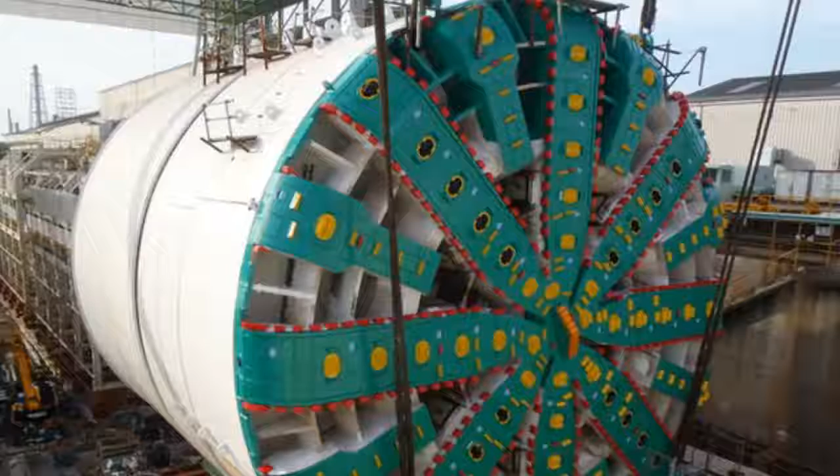Hard grind: the epic journey of the world's biggest tunnel boring machine.

On April 4, the world's largest tunnel boring machine broke through to the open air after almost 4 years underground. Called Bertha, the giant digger was tasked with building a tunnel large enough to carry 4 lanes of motor traffic under the heart of Seattle.

The story of how it made the 1.7 mile, 2.7 kilometer journey under the skyscrapers of the port city is not only a tale of a remarkable machine, but also of civil engineering, geology, politics, luck, and proving the old adage that anything that can go wrong, will.

Bertha's journey started not in Seattle, but in Nisqually, Washington, about 60 miles, 100 kilometers, south of Seattle. On February 28, 2001 at 10:54 a.m., the rural community was the epicenter of a magnitude 6.8 earthquake that rocked the region. Now known as the Nisqually or Ash Wednesday earthquake, the tremors wreaked havoc on the cities and suburbs to the north.

In Seattle, about 400 people were injured in the quake and 1 person died of a heart attack. Meanwhile, the brick facades of older buildings shattered and rained down on cars in the street, and many places of business were evacuated for fear of ruptured gas lines.

Though the traffic system was paralyzed by people trying to get home and the landlines and mobile networks were jammed, most places got off lucky with little more than knocked over furniture, and cans and boxes strewn on shop floors.

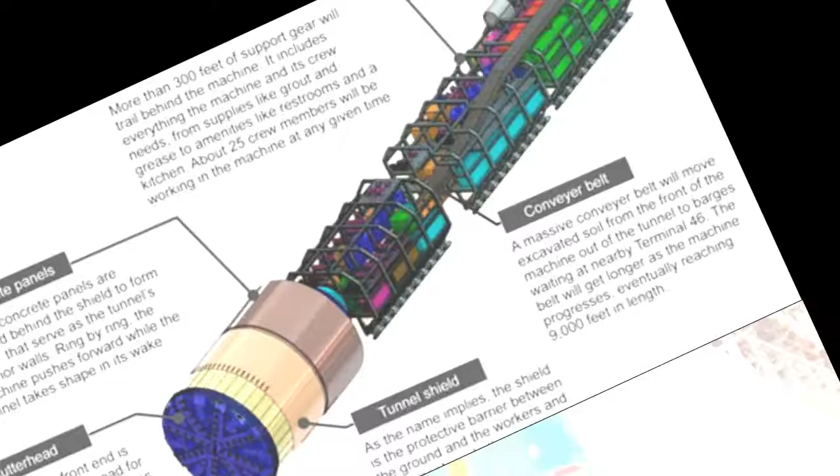But one thing that was hit hard by the quake was the area's infrastructure. Inspections showed that most of the bridges in the Seattle area were inadequate to withstand another such tremor, and a crash program was initiated to retrofit all the bridge piers with concrete sleeves as reinforcement. It was expensive, but it seems to have done the job, with one exception: the Alaskan Way Viaduct.

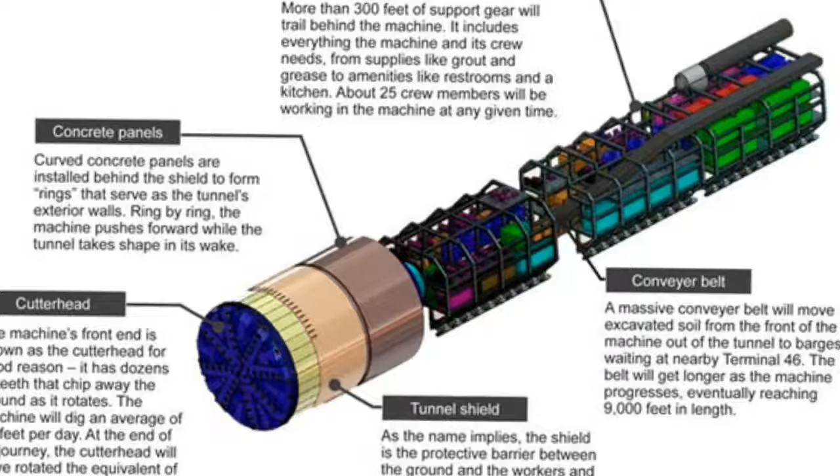A fixture of the Seattle waterfront since the 1950s, the viaduct was a 2-tier elevated roadway that is one of the major north-south arteries of the city, carrying tens of thousands of commuters and goods lorries each day on a scenic route along the waterfront.

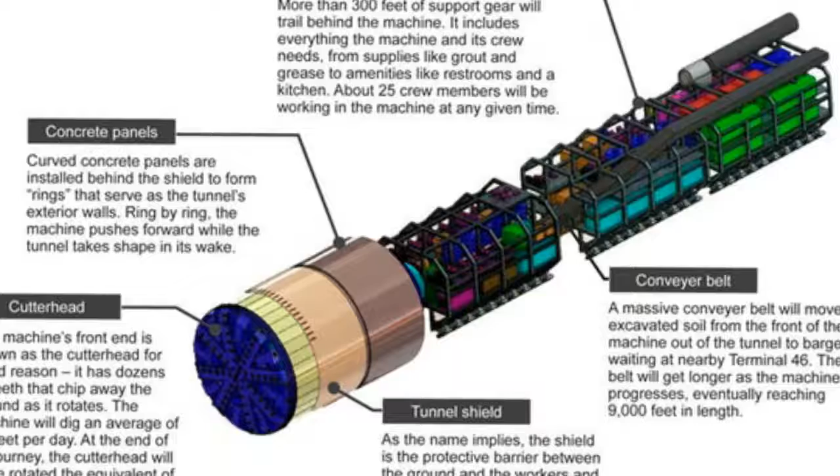It had suffered a moderate amount of damage in the quake, but engineers assessed that there was no point in making the extensive repairs needed because the structure was too dangerous. The basic design was too light and, instead of sitting on a solid foundation, the support pier sat in a bed of alluvial redeposit soil.

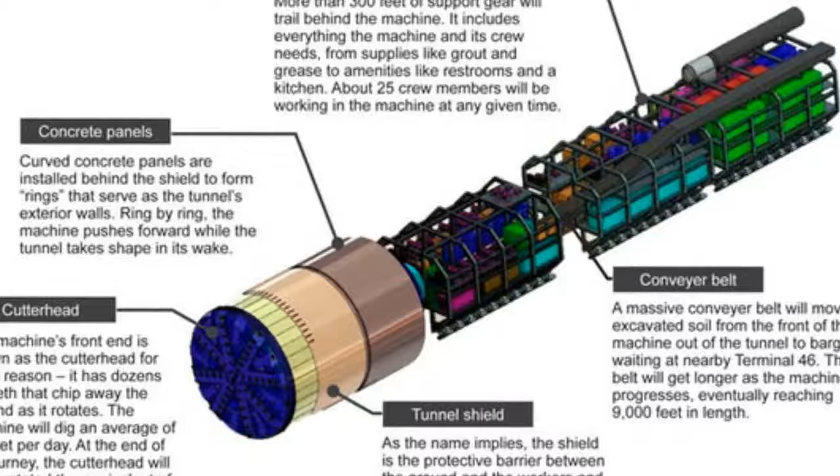Though the worst was repaired, the experts concluded that another earthquake could cause the viaduct to pancake, as happened in 1995's Great Hanshin earthquake in Japan. The question was not whether to tear it down, but when and what to replace it with.

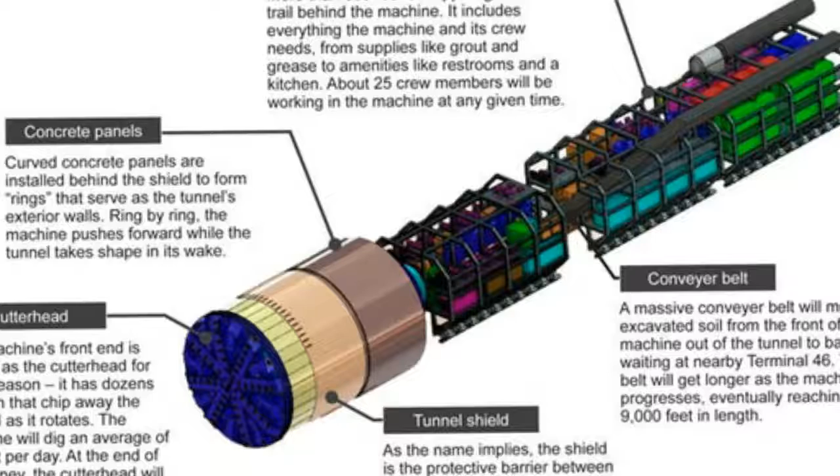What followed was almost 8 years of debate, deliberation, hearings, and flat-out arguments. Some people wanted to replace the old viaduct with a new one to keep things as they were. Others felt that the viaduct cut off the historic waterfront from the rest of the city and turned the area under it into a gloomy underworld.

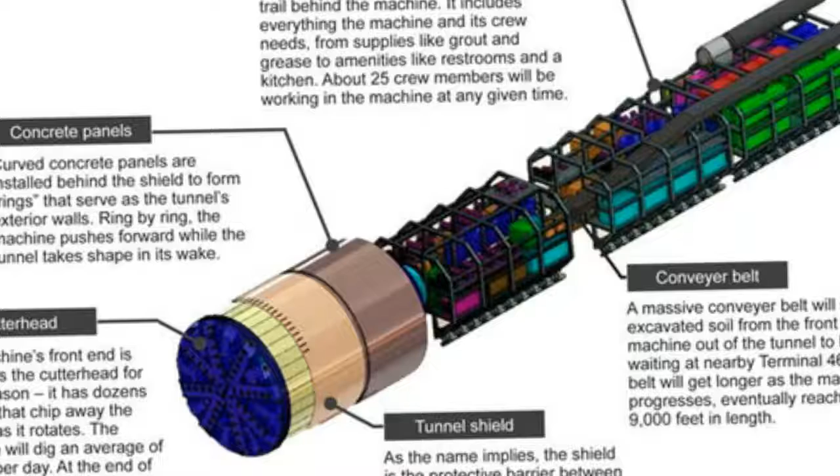Some advocated replacing it with a cut-and-cover tunnel. Others wanted a surface-level roadway. And the unabashedly anti-motor car types wanted the viaduct torn down and not replaced at all.

In all, over 90 proposals were looked at, but in January 2009 the state and city governments announced a new project by the Washington State Department of Transportation, WSDOT, and Seattle Tunnel Partners, a partnership of Spain's Dragados and Tutor Perini in the U.S. In this, the viaduct would be demolished and north and south stretches of State Route 99 would be reconnected by a $3.1 billion tunnel that would run away from the waterfront, the line of the viaduct.

and the Battery Street tunnel that linked the viaduct and the north end of the roadway. The tunnel would run under the city center at a depth of 200 feet, 61 meters, to avoid a forest of pilings, cables and pipes from some 160 buildings above. Meanwhile, the waterfront's sea-wall, which was also inadequate, would be rebuilt and strengthened.

This latter project was a tricky job in itself because the area is made up largely of redeposited soil from harbor dredging and is the home of several historic warehouse piers that are now major tourist attractions: the Seattle Aquarium, an active ferry port, a hotel, and a cruise ship terminal. It was thought that the tunnel would be least disruptive.

All this may sound straightforward enough, but to replace a roadway with as much traffic as SR 99 carried on a daily basis with a deep tunnel was unprecedented.

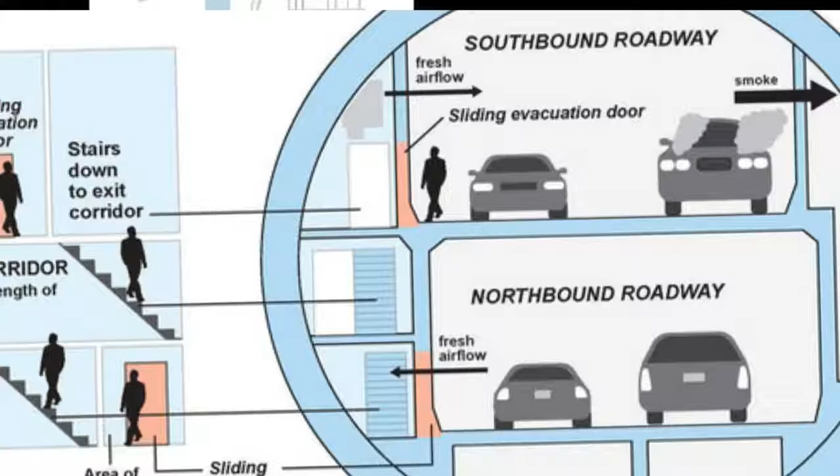It was not only deep, but the plan was for it to be 1.7 miles, 2.7 kilometers, long, and wide enough to hold a 2-lane double-decker road, ventilation and firefighting equipment, and an emergency pedestrian walkway concealed in one wall. Put all that together and the engineers soon realized they would need a tunnel boring machine, TBM, and not just any tunnel boring machine.

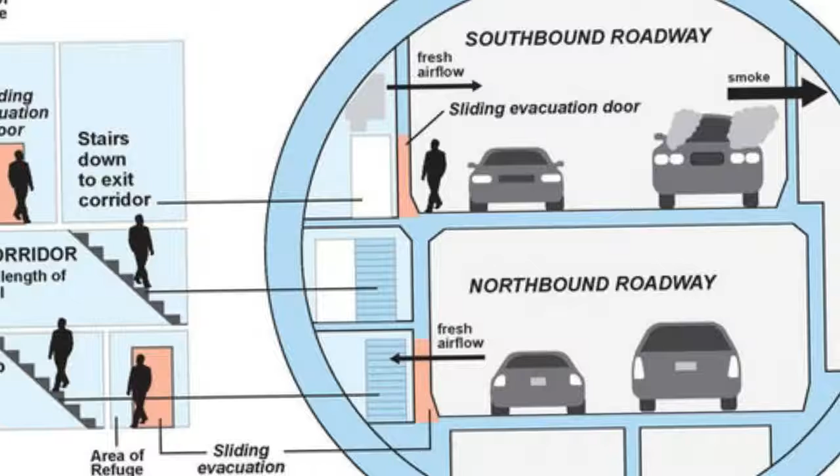TBMs are actually not that new. The first one was built by the famous engineer Sir Marc Isambard Brunel in 1825 to dig the Thames Tunnel at Wapping in London. Along with Thomas Cochrane, Brunel invented a machine that was basically a giant iron can, called a shield, turned on its side with one end open.

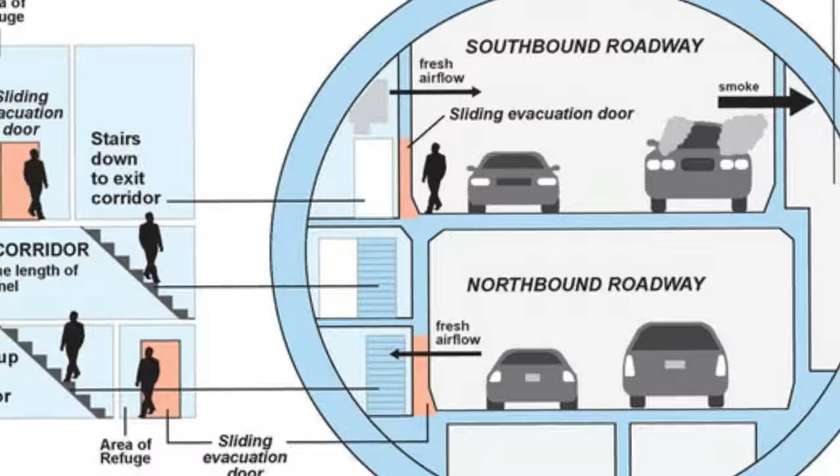The closed end is pressed into the digging end of the tunnel and consists of rows of small doors where workmen remove the soil using picks and shovels. Meanwhile, the shield held up the tunnel walls. When enough was dug out, the doors were closed and jacks were used to push the shield forward, and the walls were sealed with brickwork.

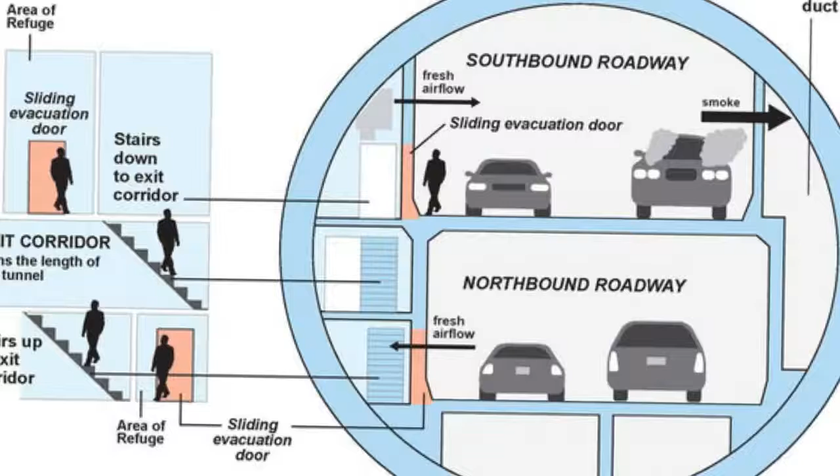Over the next century, these machines became more sophisticated as power was added alongside drills and rotating digging heads. They eventually became common tunnel excavators and were used on projects like the Channel Tunnel across the English Channel, Japan's Seikan Tunnel from Honshu to Hokkaido, Switzerland's Gotthard Base Tunnel, and the Crossrail Tunnel under London.

Bertha, named after Seattle's first woman mayor, is what is known as a soft rock TBM, as opposed to a hard rock TBM. The latter, as the name suggests, is essentially a big rock drill designed to bore through solid granite or something equally nasty.

That's not to say that Bertha had an easy time of things. Far from it. Soft rock TBMs have to contend with sand, which can be as damaging to machinery as rock, as well as gravel, clay, loam, and the odd boulder or other surprises.

Bertha had a particularly hard time because the Seattle area was formed hundreds of thousands of years ago by a series of glaciers pushing to and fro during the Great Ice Ages. This pushed up massive hills of debris made of 8 different kinds of soil under the city center.

In fact, the soils are so varied that across the face of the digging machine the soil types could vary radically. Worse, the line of the new tunnel runs from the waterfront, where Bertha was below the waterline, up under the city through 10 distinct geological zones to come out of a hillside, where the soil is bone dry.

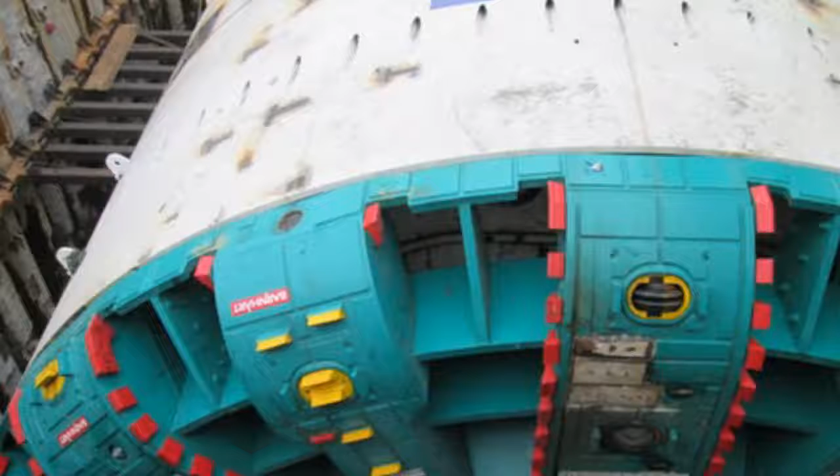It also didn't help that after a century and a half of building, Seattle is a warren of foundations, pilings, cellars, sewage lines, railway tunnels, road tunnels, and pedestrian tunnels. And then there's the famous underground city that was buried and built upon after a fire devastated the city in the 19th century. Even before tunneling began, old deposits of fill soils had to be removed and areas strengthened to withstand the passage of the TBM.

To create a machine that was large enough for the job, Hitachi Zosen Sakai Works in Osaka, Japan was selected from a list of 5 candidate firms to design and build the 57-foot diameter, 17.4 meter, mechanical behemoth. It weighs in at 6,559 tons.

It wasn't possible to ship Bertha across the Pacific in one piece, so after testing it was disassembled and shipped to Seattle, where it arrived in April 2013 and was put back together again at the bottom of an 80-foot, 24.3 meter, deep, concrete-lined pit on the waterfront in the shadow of the viaduct. Here's how it works once put back together.

New Atlas and other members of the media were invited to tour inside Bertha, and that in itself is an indication of just how large it is. Most digging machines are things you look at from the outside, but the Seattle TBM is so large that it's like a cross between a gigantic locomotive and a cylindrical factory, 322 feet, 98.2 meters, long.

Instead of a solid piece of machinery, it's filled with catwalks, ladders, and stairs. It even has a control room inside, as well as a pair of break rooms. Remarkably, despite its size, Bertha is largely automated and only needed about 25 people to operate it at any one time.

One key factor when digging is the presence or absence of water. Depending on how you look at it, they can both be a blessing or a curse. On the one hand, having water in the soil ahead makes it easier to cut through and move, so if there isn't enough, Bertha is able to inject water and a soapy conditioner into the soil to break it up into a soft paste. But if there's too much, the cutter head ends up ineffectual, churning a load of liquid mud without going anywhere.

In addition, that excavated soil slurry must be made to go only where it's wanted. To do this, the cutter head is pressurized to up to 5.6 atmospheres. This helps to force the slurry to stay in the cutter head until it's removed, but it's a fine balancing act. The machine maintains a constant pressure on the trapped soil. If there's too little, the slurry just churns inside the cutter head and the front face of the tunnel could fall in. Too much, and the machine is pushing a wave of slurry ahead of itself.

One unpleasant aspect of the pressure system is when the cutter head needs servicing. Pressure must be maintained at all times, so when a tooth is worn out or a boulder needs shifting, the workers have to take on the role of deep-sea divers and pass through an airlock to work inside a pressurized bubble of air inside the cutter head.

Directly behind the cutter head inside the machine is the slurry pipe. This is a steel tube about 3 feet, 1 meter, in diameter that has a very important function. Without it, the slurry coming from the cutter head would blast into the digging machine with 5 atmospheres of pressure behind it. Instead, the pressure is reduced until the slurry can pass safely through it, impelled by an Archimedean screw onto a conveyor belt, which sends the soil back to the end of the tunnel and out to a waiting barge on a nearby pier.

As with Brunel's original machine, this is a cylindrical hull that holds up the sides of the tunnel wall and protects the machinery and workers from muck and water. It also allows the TBM to move forward.

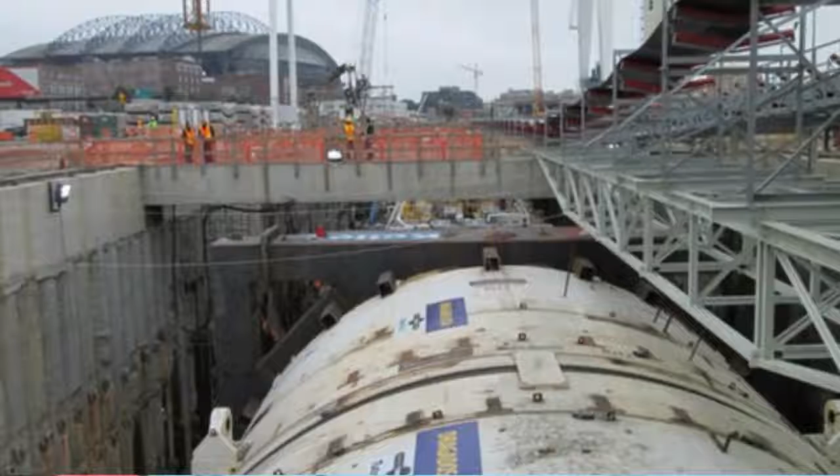In addition, there are other jacks used to align and steer the shield. The lining rings are made of 10 concrete panels, with each ring weighing 360,000 pounds, 163,000 kilograms, lined with rubber gaskets to keep water out. Some panels are shorter than the standard size to allow the tunnel to curve in certain sections, to allow it to go left, right, up, or down. Behind each panel is forced grouting to stabilize the tunnel.

One interesting thing about the lining panels is that they are not laid by hand, but by a pair of robotic erector arms that collect the panels from an electric tram and place them precisely against the inner wall of the steel shield in a staggered pattern. Having 2 arms allows Bertha to lay down panels twice as fast as other machines.

As the shield moves forward, the grouting is injected into the exposed gap where the steel once was, and the process continues. Based on previous motorway tunnel borings in Spain, this gap is designed to be as small as possible to improve stability.

Also inside the shield is the control room, where the workers monitor Bertha's systems by computer, guide it, look out for signs of earth shifting unexpectedly, or if too large a boulder is encountered that might have to be broken up by hand.

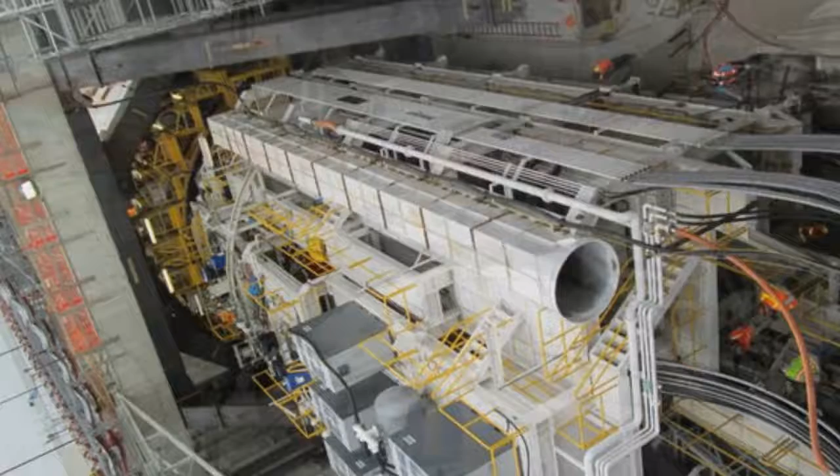Behind this is the break room, which might seem like a luxury unless you remember that by the time the digging was completed, the walk back for lunch would have been almost 2 miles.

Trailing gear: if the shield is Bertha's head, then the trailing gear is the digestive system, articulated and resting on massive rollers. The 300 feet (91.4 meters) of girders and gear contain the machinery to supply the TBM with grout and grease. Inside are the pumps, ventilation equipment, restrooms, a kitchen for the crew, and a rear control room to handle the section's operations. It's also where the liner sections are collected from a small electric railway car called a segment transport truck and moved forward for placement.

Bertha's tale: Bertha digs in on July 30, 2013, under the eyes and cameras of the international media. Bertha powered up, the cutter head started rotating, and the TBM started its career in a cloud of white dust as it cut into the cement plug on the north end of its containment pit. It was expected to emerge on the other side of the city center in 14 months, and by 2015 the project was due to be completed.

It seemed as if the actual tunnel digging was nothing but a formality leading up to the cliched and anticlimactic ribbon cutting, but it turned out that Bertha had more than rock and clay to dig through. It also had to go through a lot of unknowns to get to its goal, and some of those bit back hard.

One of the big unknowns for the project was the geology. Though the entire route had been studied and core samples drilled, the soils ahead of Bertha were remarkably complex, and this was especially true at the start, where large areas are made up of redeposited soils from dredging and construction.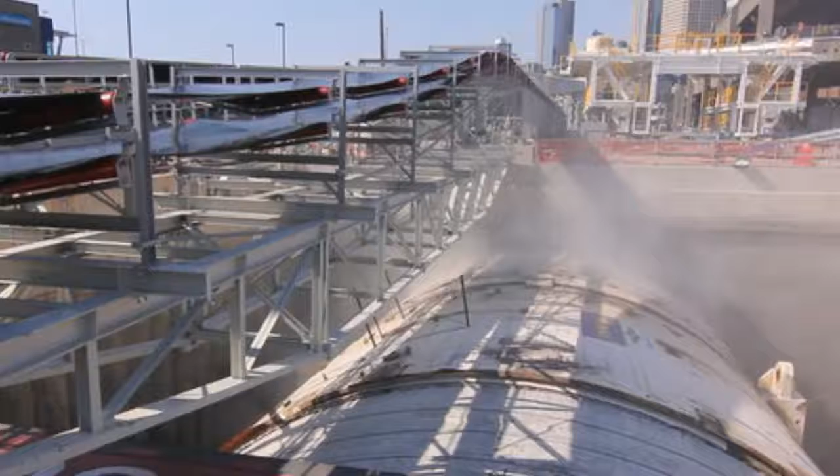However, another big unknown was Bertha itself. It was a one-of-a-kind machine, which means its one and only field test was the job itself. Even WSDOT admitted there was a bit of a learning curve as the machine dug into the earth. Exactly how it would perform and how to handle it couldn't be sorted out beforehand.

Bertha shuts down. Then in December 2013, the unknowns came together in a cocktail of failures that almost doomed the whole project. On December 3, the TBM shut itself down after traveling 1,083 feet (330 meters), having struck a steel pipe that the Seattle Times newspaper said was used by WSDOT engineers to measure groundwater and had been left behind by mistake. Then on December 6, things really got bad.

The rubber seals around the main bearing failed and grit got into the workings, resulting in broken parts and damaged gears as the TBM overheated alarmingly. Whether this was due to hitting the pipe or due to design flaws is still part of a legal dispute between WSDOT and the contractors, but the upshot was that after several attempts to move, by February, Bertha was trapped 120 feet (37 meters) underground with no way to back out.

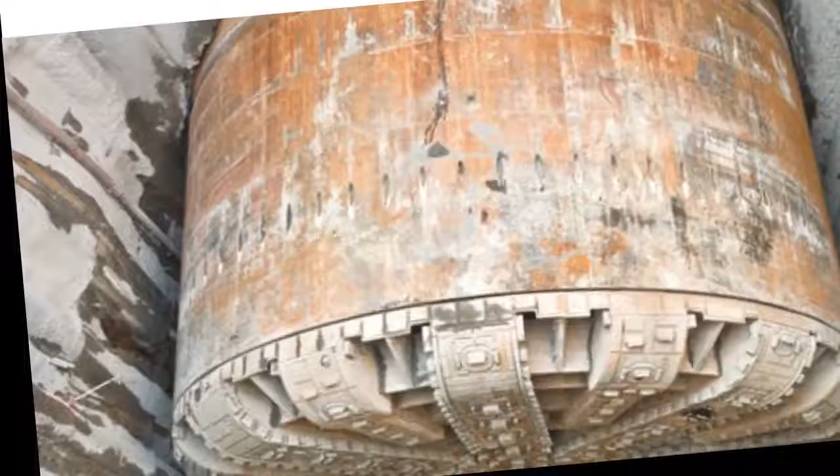Repairing Bertha, a month later, Hitachi concluded that the only way to repair Bertha was to dig it out and partly dismantle it. In other words, saving a major engineering project would mean starting another major engineering project. To repair the TBM would mean sinking a 120-foot deep, concrete-lined shaft ahead of Bertha in an area of unstable, waterlogged soils, coaxing the boring machine forward into the pit, lifting out the 2,000-ton cutterhead, partly dismantling the machinery, replacing a large percentage with redesigned parts, putting it all back together, testing it, reburying the whole thing, and then resuming digging. All this while dealing with mounting costs, union problems, political battles, lawsuits, and demands to shut down the project completely and leave Bertha where it was forever.

It was simple, like the Normandy invasion. Bertha in the repair pit.

One advantage of tunneling under a city is that it avoids the contractor's bane: archaeology. Many places have strict environmental regulations to protect archaeological sites, requiring proper surveys before disturbance. That was fine until it became necessary to dig the rescue pit, an area that included historical pits previously excavated and refilled. Now more geological survey holes had to be drilled for a detailed soil picture, and 60 test holes had to be dug to look for artifacts. Fortunately, nothing significant was found.

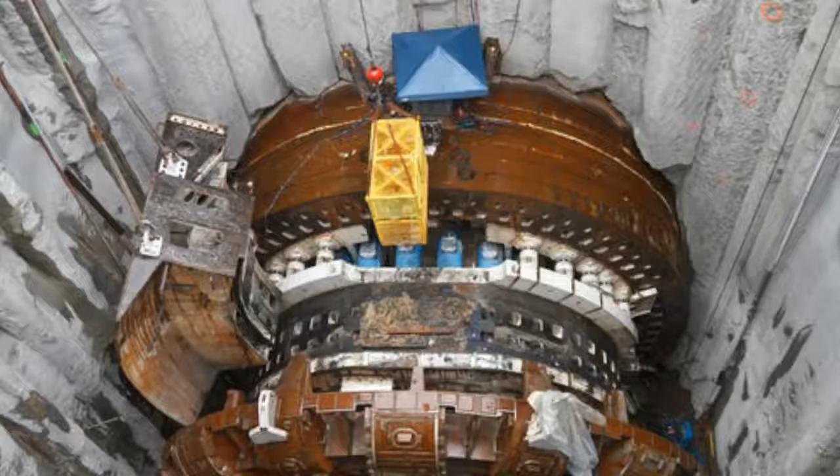More significant were the long delays caused by the breakdown. The damage to Bertha turned out to be much more extensive than originally thought, leading to lawsuits between the contractors over who should pay for repairs and delays—lawsuits that are still ongoing.

Equally significant were the delays caused by digging the rescue pit. Because the area was so waterlogged, engineers had to drill holes and pump water out of the ground, otherwise the earth would have collapsed in on itself like a soggy cake. It's a standard procedure, but not in such a built-up area, and in December 2014 a large crack appeared in a road in the historic Pioneer Square district. Fearing the pumping operations were causing a sinkhole, work was again delayed as new surveys were conducted and countermeasures implemented.

It took two days to cut through the plug itself, without overheating or stalling. It took a few more days to clear the pit of debris and move the front of the machine onto a pair of giant skids. Meanwhile, at the top of the pit, a giant traveling crane capable of lifting 4 million pounds, 1,800 tons, waited to lift the cutter head and other components out for repairs and replacement.

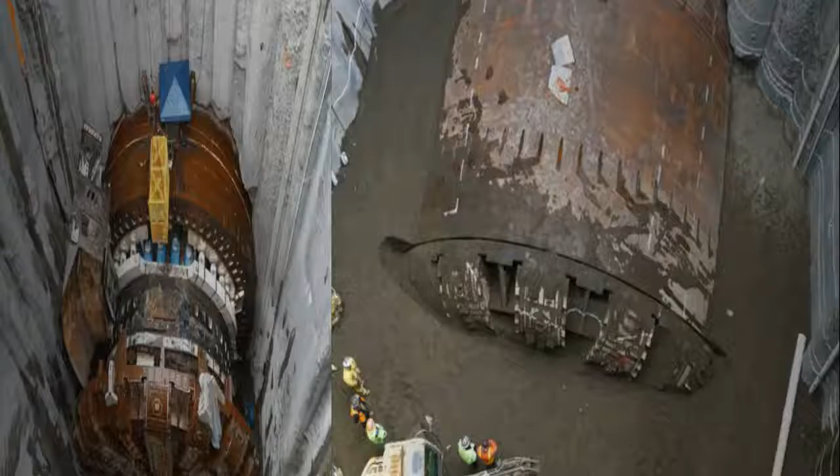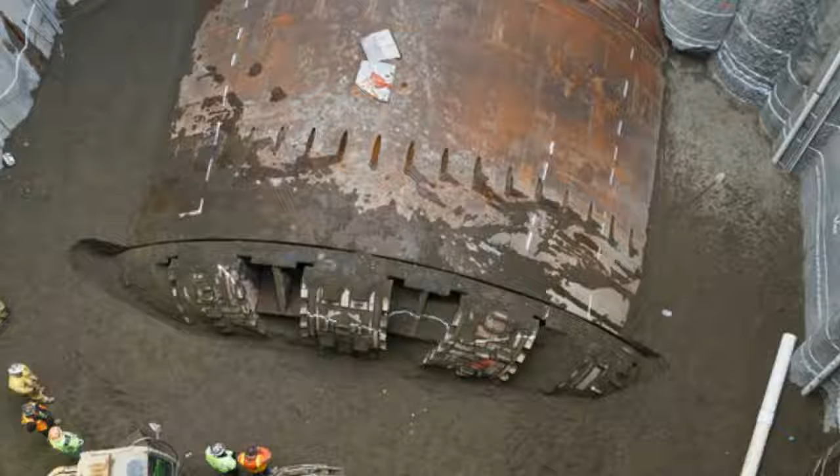Since Bertha was considerably larger than, for example, an MG Midget, and much of the shield had to be cut away with torches, the repairs took until December 2015. This involved hauling out the cutter head in one piece to refurbish it and replace many of the cutters, putting in new gears, installing a redesigned main bearing as well as new seals, electric cables, hydraulic lines, pumps, and control systems—not to mention putting back all the bits taken out to get at the damaged parts and re-welding the shield back into place.

Once all of this was done and running tests were completed, the repair pit was filled in with sand, capped, and the water pumps were turned off to allow the water table to reassert itself. Shortly before Christmas that year, Bertha started to move forward.

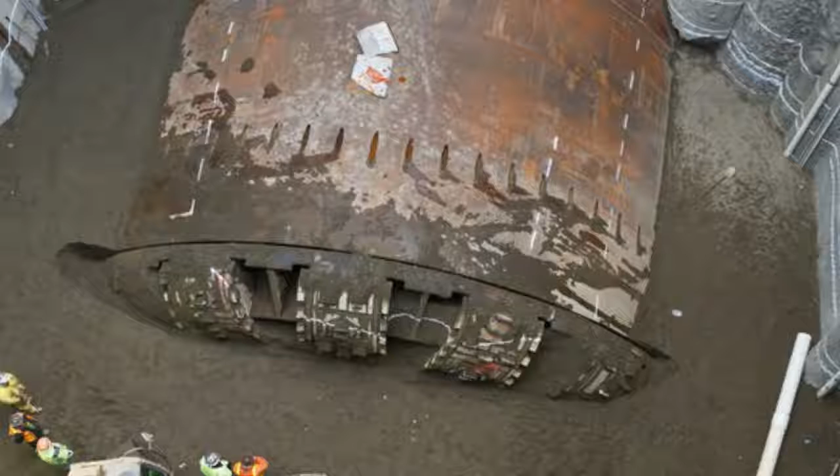With Bertha undergoing post-repair tests, it seemed the worst was behind. But in January 2016, as Bertha tunneled through a layer of stiff clay mixed with sand and gravel at a depth of about 120 to 150 feet (37 to 46 meters) under the fragile viaduct, another sinkhole opened up 100 feet (30 meters) behind the TBM, causing another shutdown for six weeks as 250 yards of concrete and soil were injected into the hole to stabilize it.

More serious was the political fallout, as recriminations flew regarding over-excavation of soil, demands for more aggressive procedures to stabilize the earth around the tunnel, and renewed calls to abandon the project altogether. There were more arguments over who should compensate whom for the delays. At this point, one almost expected someone to sue himself.

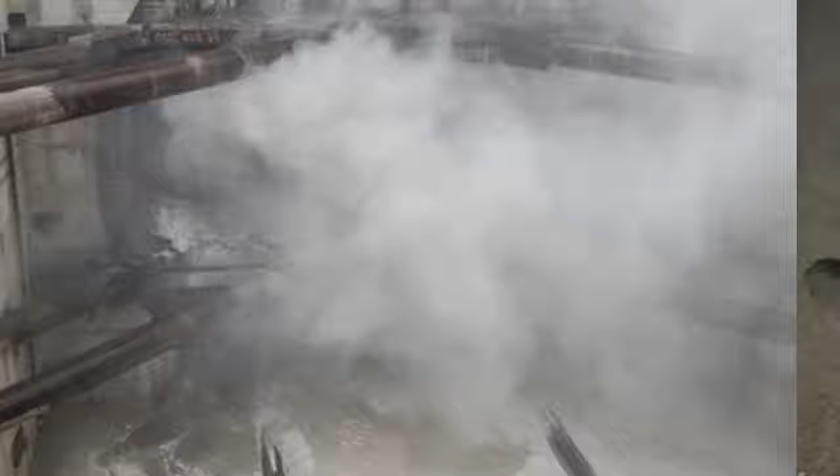Bertha digs again despite all of this bickering. Digging resumed on April 29, 2016 in a very public fashion. Despite being almost 200 feet (61 meters) underground, the residents of Seattle were well aware of what was going on, because the viaduct, still in use, was shut down for a fortnight as a safety precaution. When you tell 100,000 commuters they have to find another way to get to work, it gets noticed. Fortunately, no damage was caused by Bertha's passing, and the route reopened in May.

After that, Bertha dug deep under the city center, and the chances of affecting anything on the surface grew more and more remote. For the next 11 months, the TBM tunneled away without incident, with occasional stops for inspections and maintenance.

As it dug, the machine passed through many different layers of soil and the water table was eventually left behind. To compensate, Bertha started squirting water jets in front of the cutter, as well as foams and conditioners to break up the soil. Meanwhile, the usual arguments about money, schedules, insurance, and who was at fault over the initial breakdown continued between the state and the contractors.

Breakthrough then, after a final 6-inch course correction in March 2017, Bertha was at the end of its long and controversial journey. On April 4, after over 2 years of delays, the giant drill cut through the concrete plug at the reception pit built for it at 6th Avenue North and Thomas Street near the present SR 99 route. With suitable drama, the great machine ground its way through the plug, sending up clouds of dust as water jetted out and huge chunks of cement and rebar crashed into the pit as the press looked on. Dust erupts as Bertha breaks free.

It was an historic event, but history is not very kind to the likes of Bertha. It's a one-of-a-kind machine built to carry out only one specific job. Perhaps it would have been nice to put it in some extremely large museum, but it's also a very valuable piece of equipment, too valuable to let sit idle.

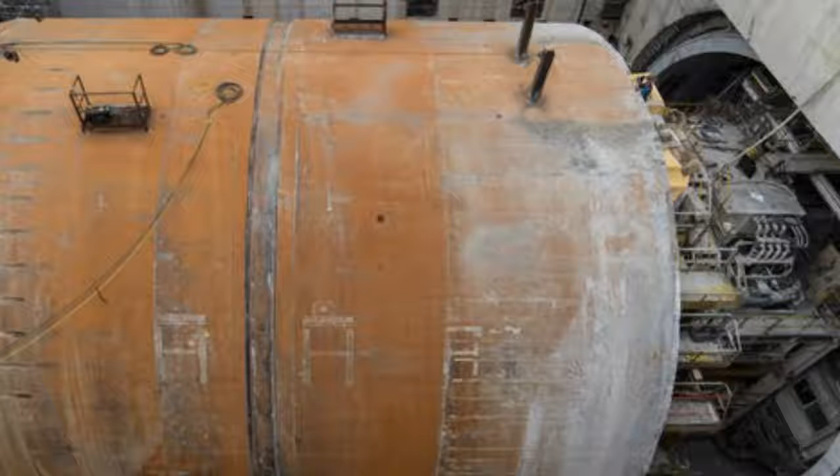The end of Bertha instead. Bertha is currently being dismantled in the pit at the north end of the tunnel, which will afterwards become part of the ramp connecting with the motorway. The cutter head and shield are being cut up into pieces smaller than 20 tons (18 tonnes), so they can be taken away by road, and most of the steel used to build the machine will be taken to a local iron foundry to be melted down to build the fittings inside the tunnel. As for the motors, pumps, electronics, and the rest, they will be sold back to Hitachi.

Meanwhile, work will shift to the inside of the tunnel to build the double two-lane decks that will carry cars north and south. The seams of the lining need to be minutely inspected, electrical systems need to be installed, firefighting apparatus fitted, and the ventilation brought online. There will even be a system of variable signage that can be altered to suit present traffic and road conditions. If all goes to plan, the tunnel will open to traffic in 2019, 2 years and over $200 million outside of plan. Bertha being dismantled.

So what can we take away from the story of Bertha? Having been inside it and personally witnessed both the start and the end of its tunneling career, I can confidently say that it is the most remarkable big machine I've ever seen that didn't float and didn't have a propeller at one end. Built in the wake of a natural disaster, it shows that we don't live in an age of make do and mend, and that thinking big isn't something left behind in the 20th century.

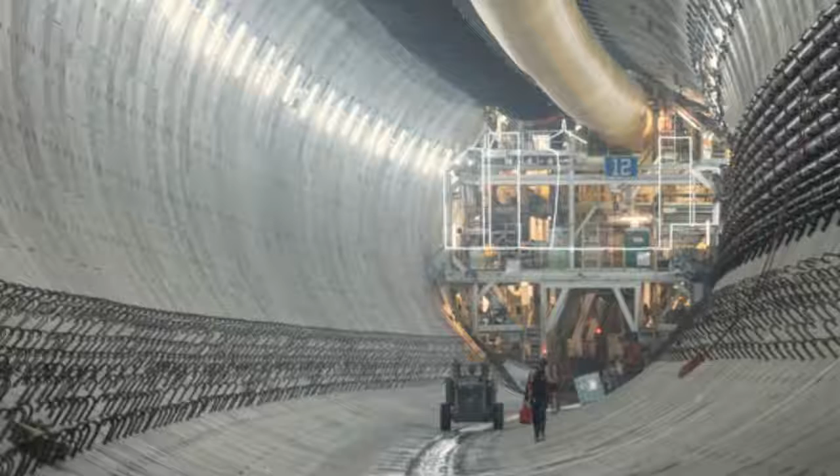Bertha is also a lesson in humility. It shows that in civil engineering, like in war, the plan only lasts until the first shot is fired and that the supreme law is Murphy's Law. Things break, money runs out, bureaucrats bicker, and even the most well-intentioned projects can come to nothing. Near Lake Washington on the opposite side of Seattle from where Bertha broke through are the famous ramps to nowhere, which are left over from an expansion of the WA 520 motorway that was never completed. More than once, Bertha came close to joining them.

But the most significant lesson of Bertha is the irony of how even the most heroic engineering achievements can become utterly invisible. People may gawp at the Eiffel Tower or the Empire State Building, but they also pass without a second glance the scores of magnificent bridges left by Isambard Kingdom Brunel across Britain, or the intricate system of locks and dams that keep the basins of the Mississippi and Missouri rivers from flooding yearly. Bertha from behind, that's what Bertha's legacy is.